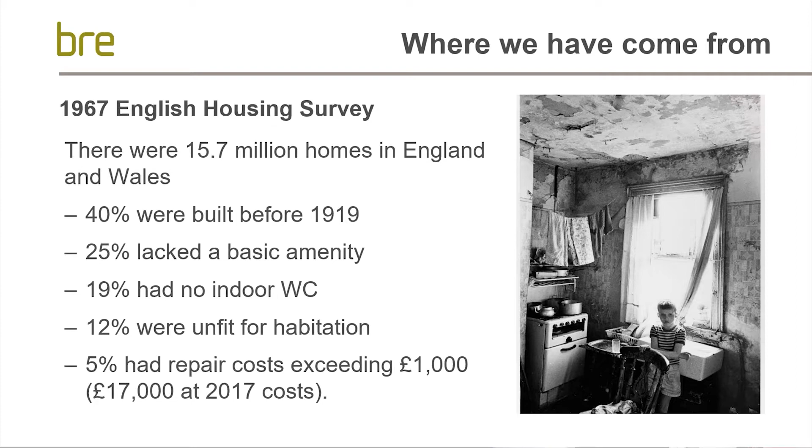The cost of poor housing is attributed to the cost to mitigate the likely hazards and disrepair or anything that might be failing decency in a property, and also to the costs to the NHS likely to treat people living in poor conditions and the effects that that can have on them. For a bit of perspective, this was estimated to be 600 million in 2010, so there has been quite a significant increase in these costs in the last 10 years.

We anticipate that 50% of our homes are over 50 years old and 20% are over 100 years old. So that reflects the picture in the previous slide that shows us that there were a significant proportion of dwellings that were built prior to 1919. And as I've said, homes will have to last for some considerable time, but at the current rate of change, it's suggested that homes will need to last 1,000 years.

So what we really need to do is understand how different buildings perform both environmentally and from a health standpoint, whilst also looking at how we can ensure that any improvements done don't counteract or trade one off for the other, and that both are always under consideration through any improvement works that we are doing.

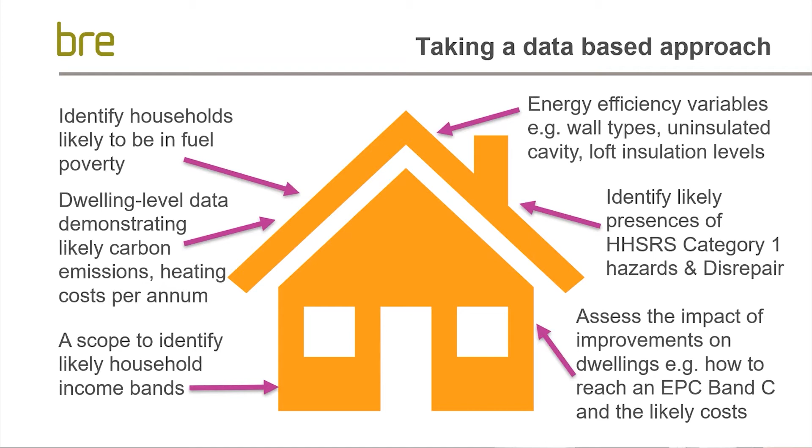Next slide, please, John. So we thought it would be helpful just to show some examples of how this is being used in practice in the real world. So Bolton Council, they wanted to understand the condition of their private sector housing stock specifically, and using the stock condition survey alternative, which is stock modelling, they were able to identify dwellings at risk of failing decency by predicting the presence of hazards, low-income households and households likely to be in fuel poverty.

But what this data also allowed them to do was to target the households with health conditions that were also living in poor housing, so therefore likely to be at risk of further issues impacting their health and well-being. So, for instance, they looked at those occupying homes with COPD and also living in cold homes, where the two would not be compatible together and would likely cause poor health.

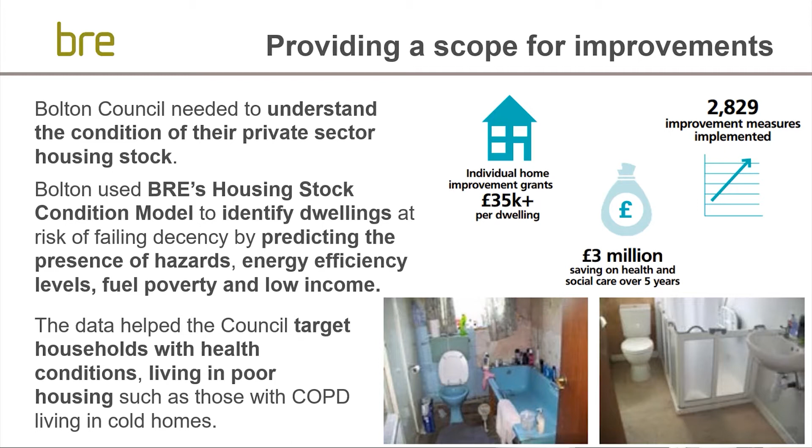And finally, we have a little video clip here that we thought would provide another example of how data can be used to support home improvements, including the identification of potentially eligible households for schemes such as the Green Homes Grant. Again, this adds value to the data that organisations may already have, and might be looking to build upon for the purposes of retrofitting and improving them.

But it adds value because it can be used in other areas across the councils, across the housing organisations, housing providers, and it enables this data to then be used for future schemes to inform programmes of work and to identify where there may be areas worth targeted intervention. So we'll just play this clip for you now.

Brilliant. So I'm going to pass over now to my colleague who's going to talk more about strategy development through this customer journey that we're moving through, the life cycle of retrofitting. Thank you, Megan. So once we understand more about your stock, what is the next point? What do we do next on the journey to achieve those grand challenges of achieving net zero, looking at our aging population and that wider conversation as well? So John, if we could have the next slide.

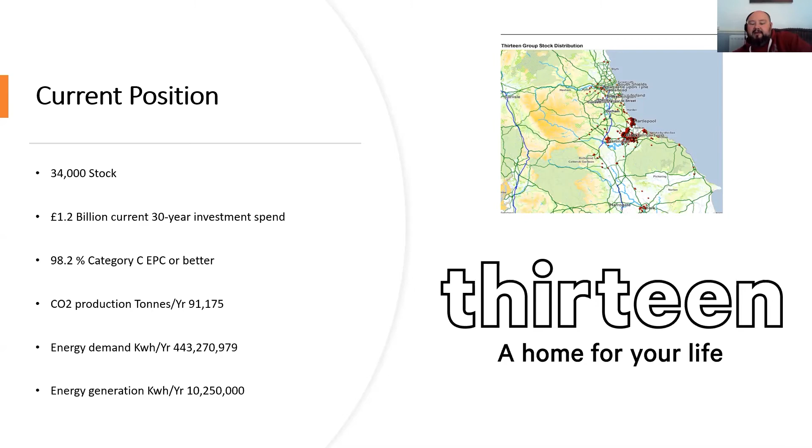So what have we done so far? Well, we've done a lot of component pilots over the last 5 to 6 years. We've installed around 750 air source heat pumps, which we've actually found to be quite good. I know there are some negative issues. 60 of the NIBE units, which we had issues with. We've got 57 ground source heat pumps. We've got 40 of the hybrid air source heat pumps, which also have a gas supply.

We've got 2,500 properties with PV. We've got 14,000 properties that have whole house ventilation systems. We have around 3,000 homes that have EWI or IWI. We piloted a Sprayseal roof insulation to trial that product. We've now trialed SumAmps for water heating, and we have done some integration of IoT into some of our properties to make them smart in the way that they work.

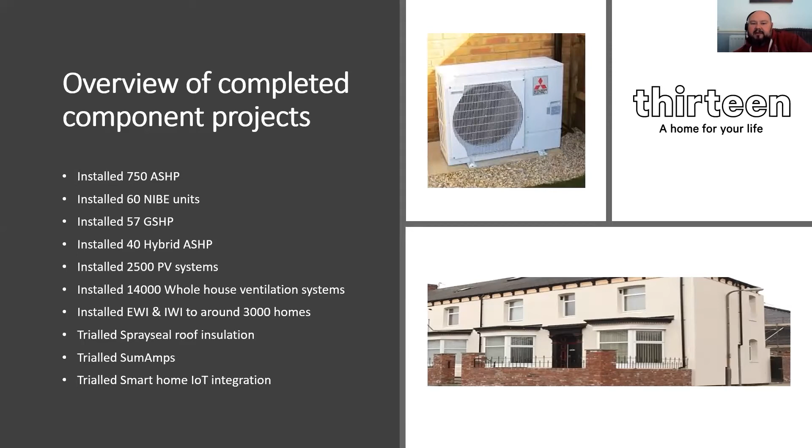So when we were looking at what we're going to do for decarbonisation, we've now made a decision that it is Fabric First to full house retrofit. So we're going to try and make the biggest impact to our customers, both on reduction of carbon, reduction of bills, but also in ensuring that the properties moving forward are fit for purpose. So that the properties are an aspirational place to live and meet the current and future demands of our customers.

So understand that we've created a little bit of a loop that we follow. So we ensure that the property has high levels of insulation, that insulation has continuity throughout, that the property has airtightness, that we have correct ventilation. We then look to integrate new technologies, and we always ensure that we have desirable homes that meet the required standards.

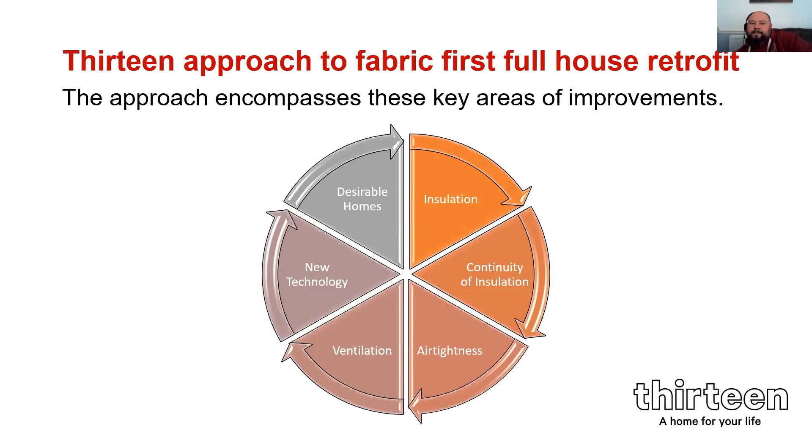So for our asset planning approach, what we've done is we've developed a holistic survey, and we've done that in partnership with Savills. They've come on board and helped us to ratify what we've done and make sure that that is correct and the logic follows through. That allows us to understand the financial requirements of meeting the carbon neutrality, whilst also we create those desirable homes for our customers. But more importantly, it also takes into look the infrastructure wider.

So it looks at whether or not we've got capabilities to provide off-street parking for future electric vehicles, whether or not the infrastructure of the electrics to the properties and the surrounding estates is there to support future high levels of electricity demand, whether or not we've got digital infrastructure in place that can enable us to provide fast broadband speeds to our customers, but also things like if we had to, what would the possibilities be of a district heating system, or alternatively, what would be the requirements if we had to switch over onto a hydrogen power system for our boilers.

On top of that, what we're also doing is we're developing new modelling. So we have a sustainability model that lets us know how all of our assets are performing at 3 different levels: an estate, a street, and a granular property level. So at any one time, we know what the performance of that property is on 39 different social factors plus the financial factors. And that helps us to understand where we should invest and where we should disinvest, the levels of investment that are capable within our portfolio, but also to allow us to move forward and plan in a smarter way.

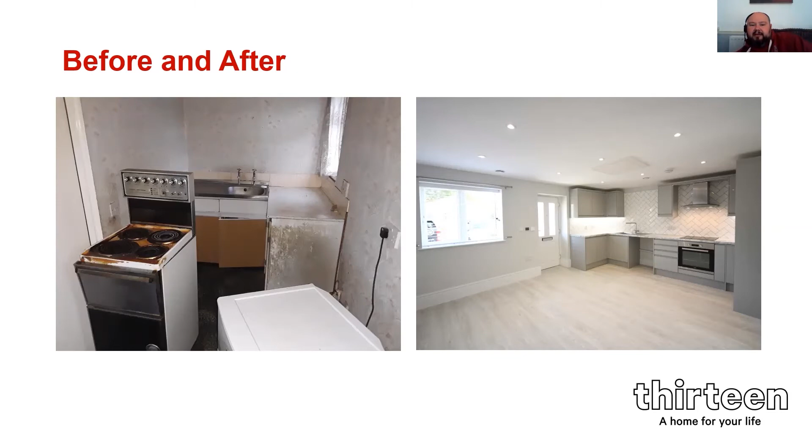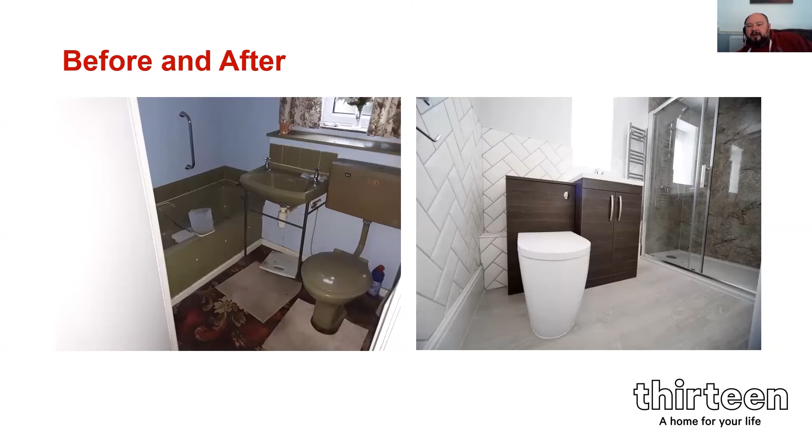That there is a 99% finished bathroom. On the right, it's actually completely DDA compliant, apart from at the moment we've got some invisible adaptations to go in for grab rails and things. We wanted it not to look like a hospital bathroom. We wanted it to look like something from a hotel, but still be completely compliant. We've put pocket doors in again to maximise the space, and we've just made it look a lot better.

Some of the property technology that we've placed into this unit itself is a Sunamp water heater, which is a really clever little unit. It heats the water really efficiently, using salt and vinegar crisp flavouring to do that, which always makes me laugh. But it is a really clever way of heating the water off an electric system.

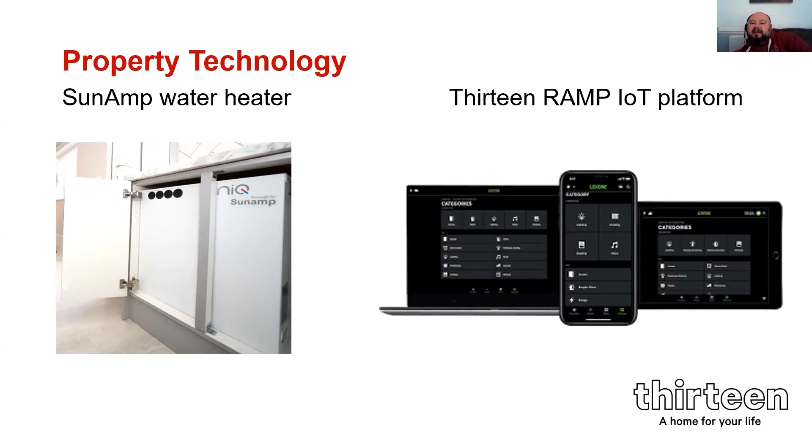Our RAMP, which is remote access and monitoring platform, Internet of Things, that we've developed in-house, gives us full feedback around heat, humidity, oxygen, carbon dioxide levels within, and it gives triggers based on that. It links to accelerometers on the occupant, so if there's a trip or fall, it actually sends back to the next of kin. It controls components within the property to balance the microclimate within the house. It also gives us the ability to cut off, if we need to, the water, the electric to specific components, or if it has a gas property, we can cut off the gas supply as well.

We fit the mechanical vent heat recovery, which is actually our primary source of heat within this property. We haven't got a boiler. That mechanical vent is providing all the heat that we need and recirculating the quality of air, fitted with the F3 filters. We have a Thermaskirt, which is our secondary heat system with a simple boost button if the customer feels that they do need additional heat.

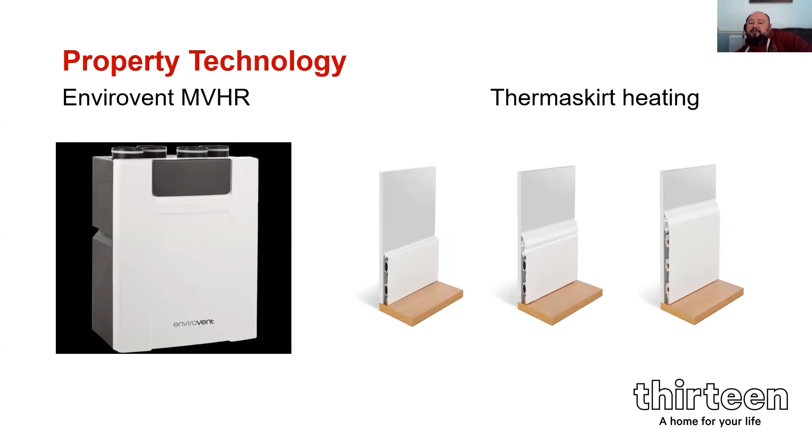We've fitted an extreme low energy circuit throughout the property, which means that it runs off DC current, which means that the cabling is actually Ethernet cabling rather than electrical wiring. And all of the switches are kinetic switches, so therefore there's no wiring into any of the walls. It's all just done from a kinetic switch that can actually be taken off the wall if a customer needs it and used anywhere throughout the property.

So that was a quick run through of what the project looked like. Now, some of the key findings were the property that I showed you there actually has vacuum pack internal wall insulation. Whilst we found it to be really efficient, and it's really thin, it's brilliant for fitting onto internal walls and getting your thermal efficiency. The problem that we have is if a customer puts a nail through that wall, we have got great concerns that the perforation of the vacuum will cause significant damage to the efficiency of it. So that is a concern for us moving forward. We've moved away from the vacuum pack insulation for that exact reason, and we've gone with an aerogel product.

The ventilation, when you seal the property in, does increase the heat and the humidity in there. So it's really key that you balance the climate within, which is why we've set up our RAMP system to do that automatically, to ensure we don't build up problems around condensation and mold.

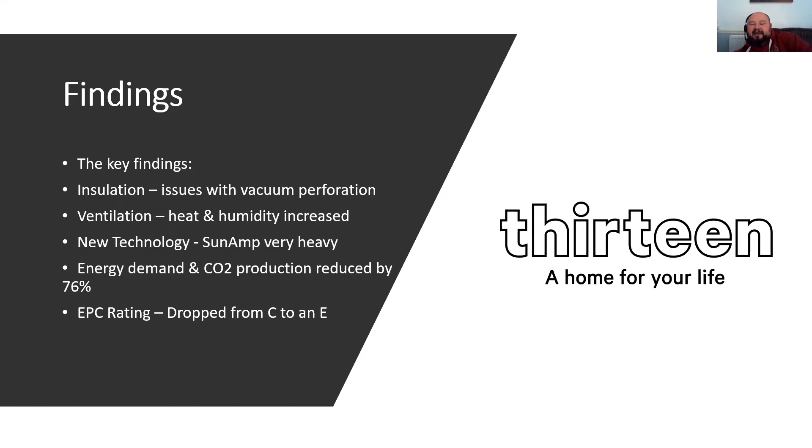We actually have 27 kilowatt hours per square metre per annum, and a U value of around about 0.25. But the thing that was a real shock to us, especially given what we've just heard, is we did all of this work and the EPC rating dropped from a category C to a category E. So that's everything from me on, around the costs. I nearly missed the important bit.

So our current data shows that adopting the approach increases our spend by around 52% in our 30-year budget. But working alongside some of the other partners that we have, such as Savills and some industry partners, about reducing costs, and on top of that, the understanding that by 2045 we believe that the grid will be decarbonised, we're now expecting to increase our 30-year spend by around 35%.

So that is actually the presentation. So it's just if there's any questions or thoughts or any feedback. Thanks very much for that, Mark. There's a question came in as you were presenting there. Is the digital twin a BIM reference?

It's BIM plus, so it's BIM modelling, but it's so much more. So whilst it does allow BIM modelling, it also has intelligent algorithms in there that do projection modelling for us. It allows us to simply drag and drop to do design elements, so we can put a different type of render and it understands, it's intelligent, it'll do the projection modelling out for us. So it's very similar to BIM, it's just we've taken it to the next stage.

Oh, and there's another one just coming. How does the tenant power things using DC power, such as a TV? So we have 2 circuits run through. So your TV, your fridge, and your oven, you have to have onto one circuit. But the majority of the electrics, at the moment, there is an inverter that's in production.

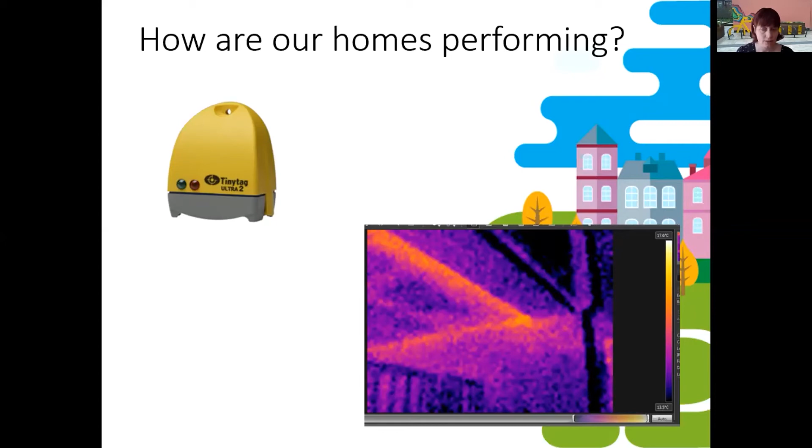We also have a thermal imaging camera, which you can see in the bottom right of the presentation, and that starts to identify where we have had some performance gap in the past. And so that particular one just shows where insulation is missing from the underside of a carport. Thermal imaging is fantastic because it saves you having to do a destructive survey, but it's not perfect. Next slide, please.

So we had some homes which on paper look good. So they were pretty much done. So this is an estate of 1970s properties. They were all achieving a D, a low D in terms of energy performance. They were electrically heated. They'd been insulated in previous programs, they had the cavity done, they had the loft done. But we were getting numerous phone calls and emails from customers saying, my home is not warm, I cannot heat my home, it's costing me a lot of money, the kids have to keep their coats on. We were having those sorts of levels of complaints.

We're sitting there going, but these homes, they've achieved a D, they've got the cavity wall insulation, they've got double glazing, they've got newish doors. Why are these not working? And we really didn't understand it. So we started to identify that there were problems there. So for example, the cavity wall insulation. We noticed that there were voids, pockets within the cavity wall insulation.

So we started to identify that actually it was failing. And what we didn't want to do was go back, take out the cavity wall insulation and then install again failed cavity wall insulation, or take out the loft insulation but not actually improve it. So what we wanted to understand is how can we make sure that we had quality performance associated with our works.

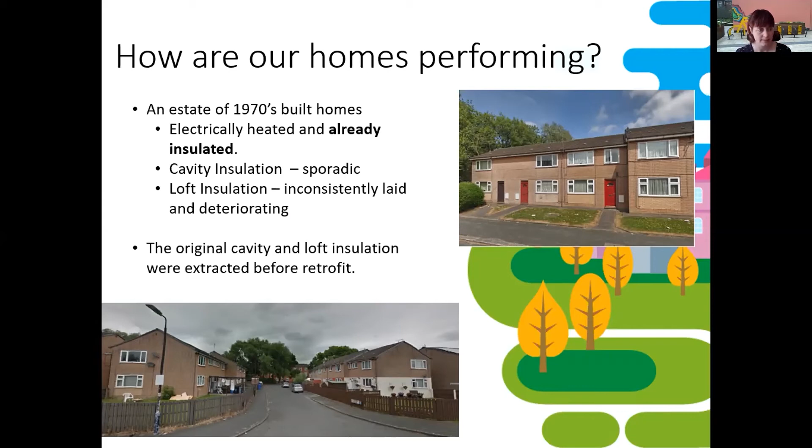Next slide, please. So we spoke to Knauf Insulation, who we've used in the past, and they came forward to say that Knauf Energy Solutions were looking at exactly the same thing as us in terms of performance monitoring, and between us we wanted to set up a project to understand how we could use quality performance monitoring as part of our actual project. So Knauf Energy Solutions looked after the quality control from design through installation, and also did the monitoring and also the final outcome.

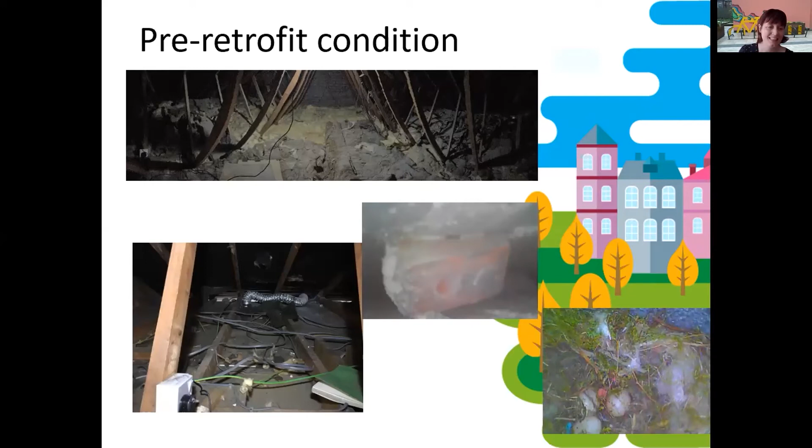Also, as we started doing works, we found things like eggs, so we had birds nesting in the insulation. We also found rats. If you just go back just one picture, sorry, thanks Liam, that's a picture of brick rubble inside the cavity itself. So there's no way that the original cavity wall insulation would have been evenly distributed throughout that cavity wall if there's that amount of brick rubble.

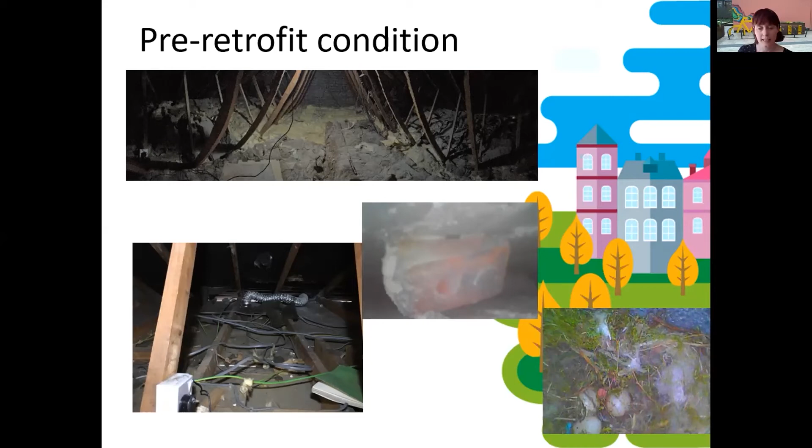Next slide. And I love this picture, just the volume of rubble that was being extracted from those cavities. It really does show that they should never have been filled in the first place. And it also made sure that we knew that we had to do the remedial works to a very, very high standard to be able to ensure that the new cavity wall insulation was actually going to work.

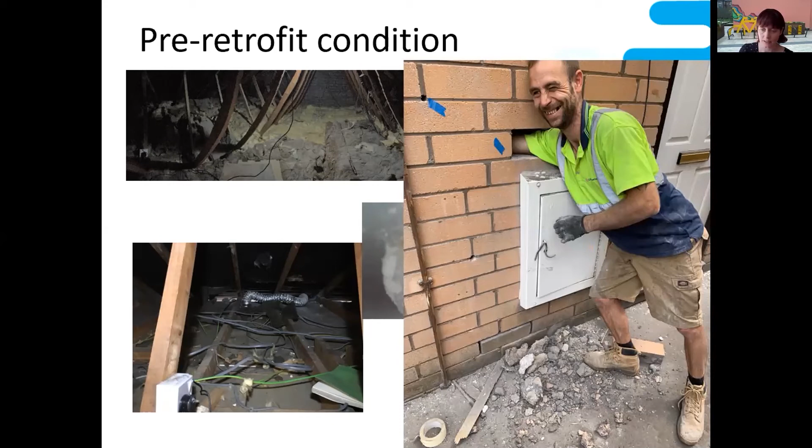Next slide, please. So having done all the remedial works, Knauf Energy Solutions then used these sensor boxes. They're dotted all around the properties. And what they do is they look at humidity, temperature, CO2, and movement, so the movement of the people within the house as well. And from that, they can then do, I guess it's machine learning, so they can understand the actual energy performance of each individual house. And therefore, they were able to demonstrate the improvements made and what impact that actually had on the house and on the occupants within the houses.

Next slide, please. So you can see here the detailing. Part of the design from Knauf Energy Solutions was to pull together the really detailed loft specification, specific for the needs of these actual homes. One of the big things for housing associations is we say this is our loft spec, and we roll out the same loft spec in every single property, but really we need to think about each property as being an individual.

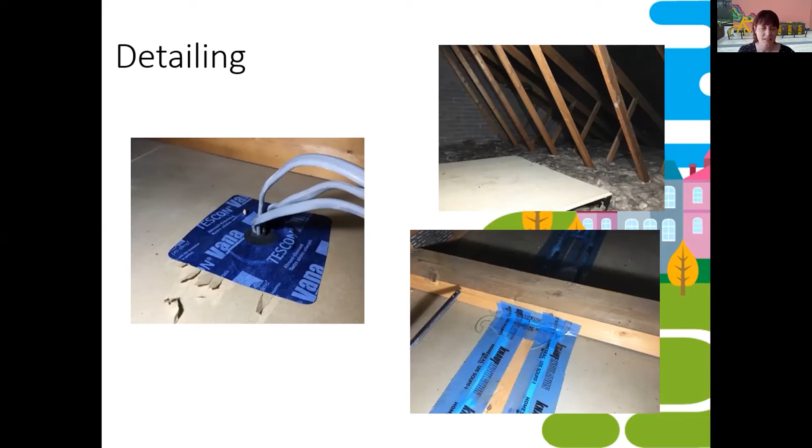So the loft insulation for this project included the full clear out, but also the taping and sealing of every single servicing penetration, and also making sure that the insulation went to the eaves and linked to the cavity wall insulation as well. It is so, so important that this is right. That sealing is so important because then you're ensuring that you're not building in future problems such as condensation and potential risk of damage to the timber in the future. Next slide, please.

And yeah, this is the end result then. Much neater cabling, but also just a sea of evenly distributed loft insulation. Next slide.

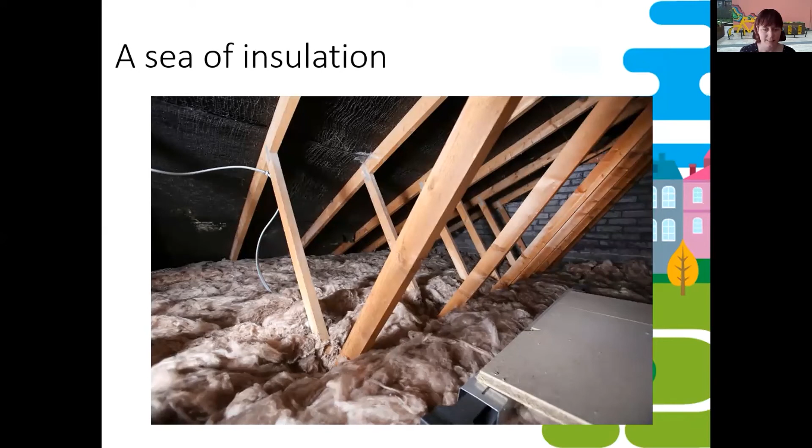This is what I love. Ironically, Knauf Energy Solutions compares our houses to cars, which as an environmentalist, I sit there and go, this doesn't seem quite right, but it works. I can understand their metaphor. So when you buy a car, you get quoted your miles per gallon for that make and model, but then you stick a driver in it, and that driver can drive that car very differently and have very, very different actual miles per gallon results.

So Knauf Energy Solutions, they're able to take into account the weather, take into account the customer, so that all of our results are just about the property or just about the car. So in the before retrofit model there, you've got Jeremy Clarkson in an old energy inefficient car. Then in the after retrofit, Jeremy Clarkson is in a new, very energy efficient car. But he wants to know how much that car or the house will actually require if you ignore the driver. And that's what they can do through the modeling.

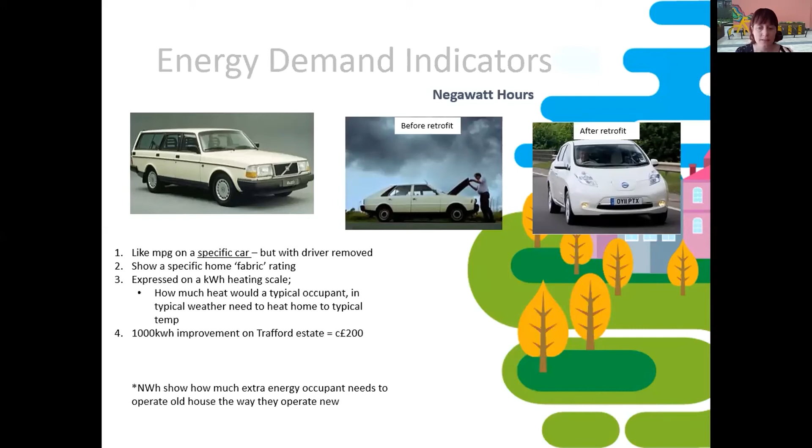So how much is Jeremy Clarkson actually saving if he drove his new house in the same way that he drove his old house? So next slide, please. You can see then here, this is the graph showing the differences in pre and post retrofit. So this is just how much the house uses with the person taken out as such. So for us, it's really, really important. So we were able to see, so I've just picked out a few there.

So the savings to the customer. So a lot of the customers didn't see any real savings, but what they did see or what they did feel was a warmer house, a house that they're more able to live in and feel more comfortable in. But the savings, so if they were to continue to run these new houses as if they were running their old ones, the minimum saving we were seeing was £375 a year, and the biggest savings we saw was £1,120 per year. And that's significant for our customers.

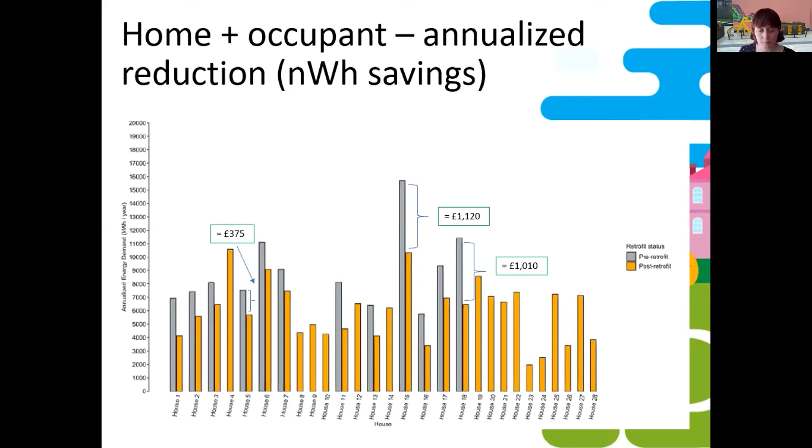So the good news is for the whole of Christmas last year, all over the heating season, we didn't get any complaints at all from any of these customers saying that they were struggling to heat their homes. Next slide, please. So we just did it on Retrofit, but there was also a program doing some new builds as well. And again, it was looking at the assured performance of those homes.

We've learned an awful lot. So we've really learned no more box ticking. We can't just go, right, we're just going to do LED lights, we're just going to do loft insulation. It's how are we doing it? How are we doing the quality control? For us as well, then, the EPC is only the starting point. It's a really useful indicator of the energy performance of the homes, but actually we need to understand how those homes are actually running.

Customer engagement is crucial. I cannot stress that enough. And we're very lucky that we've got a customer liaison officer on board who's able to speak to the residents about every stage of the project. But attention to detail and the specification, I cannot stress this one enough.